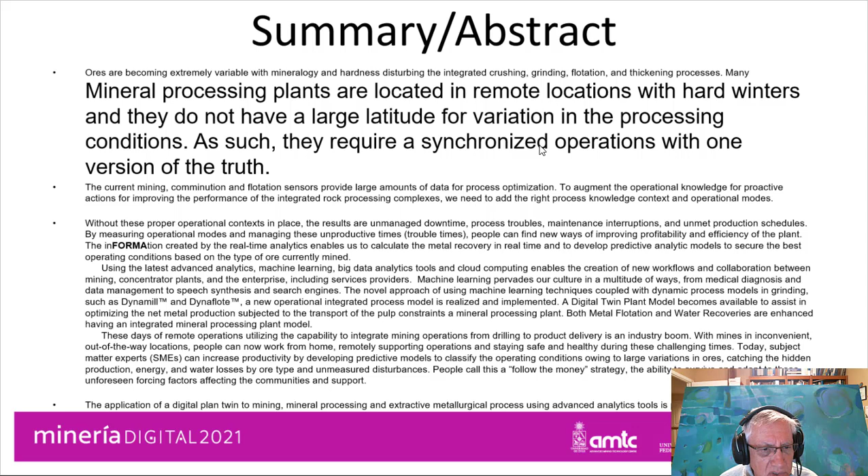You got the summary here. The most important part that I wanted to touch is basically that we have very hard ores and we don't have a large latitude for variation in the processing conditions. As such, they require a synchronized operation with one version of the truth. And this version of the truth is based upon dynamic models, which help generate the mass balances and all the energy and levels and inventories which are required to maintain stable operation.

So we're going to talk a little bit about the digital age transformation secrets, the four steps to maximize metal production, the dynamic decision support using hybrid process models and predictive analytics, and some live examples of what companies are doing.

Today, we need to reduce the variances between the production plan and operational result. We have to cleanse the data and add the missing information for improved decision support. Grinding DynaMill with viscosity model and flotation with air holdup add the missing information to the set of data collected in the operations. And this has to be done by the people at the plant. It doesn't work if we let other people do it. So that's why we require a special implementation strategy.

We have to choose the right KPIs for the digital age. We have the technology to transform the data into real information. So these are the KPIs that we should be using. Effective communication and improved decision support is a must because now, since everything is in the cloud, everybody can access it, but especially because we have the right information, everybody can contribute.

And we have to avoid the hidden production losses and equipment failures in real time. This is a must and sometimes ignored, but this is the most important part when you start building a digital twin plant for your operation. It allows you to synchronize everything together. And of course, you can innovate your operational process using the cloud, this remote work. Now with COVID, this has been a blessing because we can contribute irrespective of where we are.

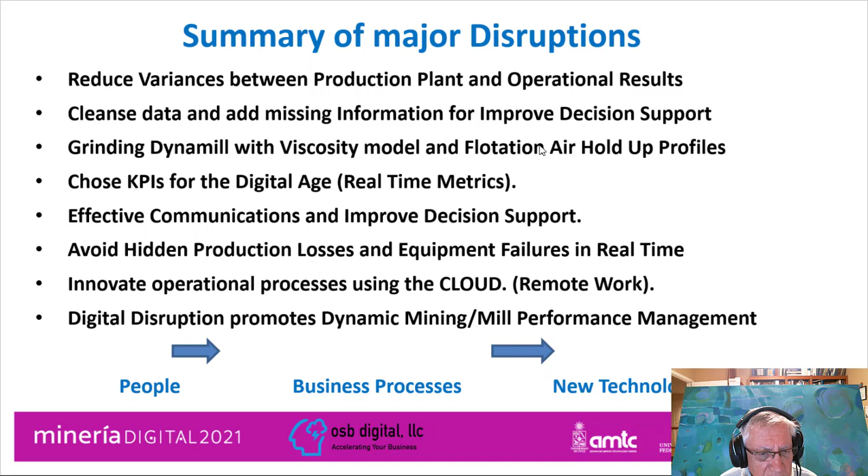This digital disruption promotes dynamic mining, mill performance management. People is the most important. That's what I'm saying. This cannot be done by someone externally. It has to be done by the people. And they change their business culture and processes. And this is what takes time and it requires a special treatment. The new technologies should be embedded into the system so it becomes transparent to the user.

So basically today what we see is that we got all these silos with this breakdown between management and operation. Management requires transactional type information, so we need to use the operation with their event frames to transform the data into transactional information in real time. That's a must. And engineering can use it and put the models, and they are the ones in charge of developing and maintaining the models. They are the ones that understand the process. Maintenance, on the other side, they know the equipment and they can do that. And mine, of course, they can do the mine the way that they understand it.

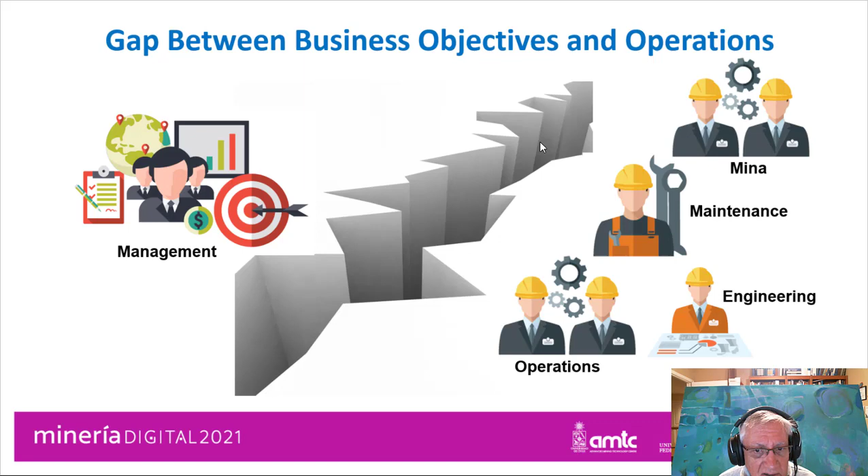So the critical pain points that we see in the production processes are drastic energy and water costs with lower grade ores. There are potential hidden costs due to the trouble times and the downtimes that these plants operate at, because they are very, very hard ores and it's very difficult. Losses of copper through the tailing thickeners. This is due to bad liberation or bad flotation on the roughers. And this is what we're going to take care of today and try to shed light on how we have been able to transform that.

We have a lot of disturbances due to the mineral or viscosity. The transportation of the pulp through the plant has to be flawless. And this is something that sometimes is ignored because we cannot really measure it. So we need to use the most advanced technologies to predict how the viscosity is affecting the whole production line.

And of course, when you start minimizing energy, start augmenting the water recovery, you are more sustainable. You are doing the best with the ore that you are receiving from the mine. So a dynamic water recovery model is something very, very important in today's targets.

We got multiple sets of data, raw data that needs to be transformed. Mining data sometimes is unavailable, so we need to capture that in real time. Not current or missing information is the typical norm. We need to organize that in what we call the digital plant model. There are a multitude of spreadsheets that have to be reduced to one version of the truth.

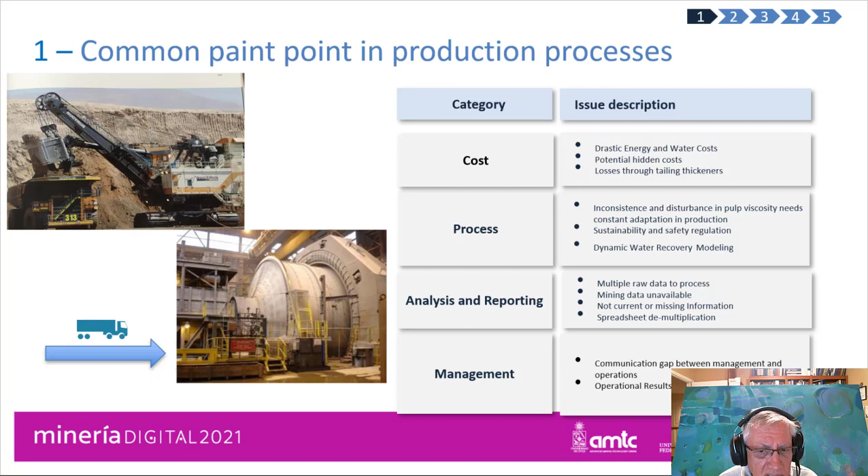Operational results sometimes don't match business objectives, and this is because the people that are doing the planning are not using the real data, I mean the real plant data, and that's really sad. One of the key things is that grinding is not only for liberation, it's also for maintaining the right equipment correctly, the cyclones, the flotation cells, the pumping, and also the most important is the water recovery.

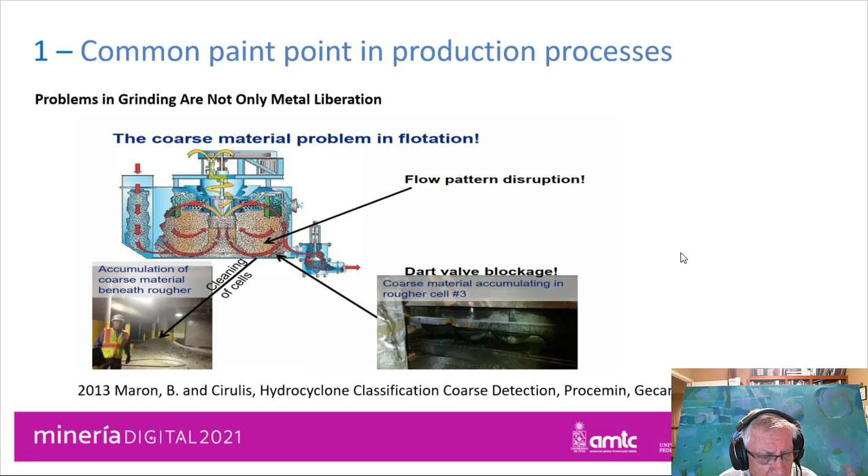The bad size distribution that we can have in a ball mill circuit repercutes throughout the plant. Once we get a bad particle size distribution outside the region in which we can do the flotation, do the water separation, and get the concentrate that we need, we are losing a tremendous amount of money.

So we need to monitor the production loss and failure in real time. We have to predict the production and analyze using tools like Power BI. We need to identify the targets or the tendencies in which the data has to behave so we can identify what we call the constraints of the plant.

These are really the 4 steps that we are using to implement the analytical models using hybrid models with the specific constraints and the variables to optimize your process. This KPI setup is done in real time, respecting the constraints which are identified in the prior step. The third is to really transform that data into information to develop predictive analytic models so we can be ahead of time and not going back and solving problems.

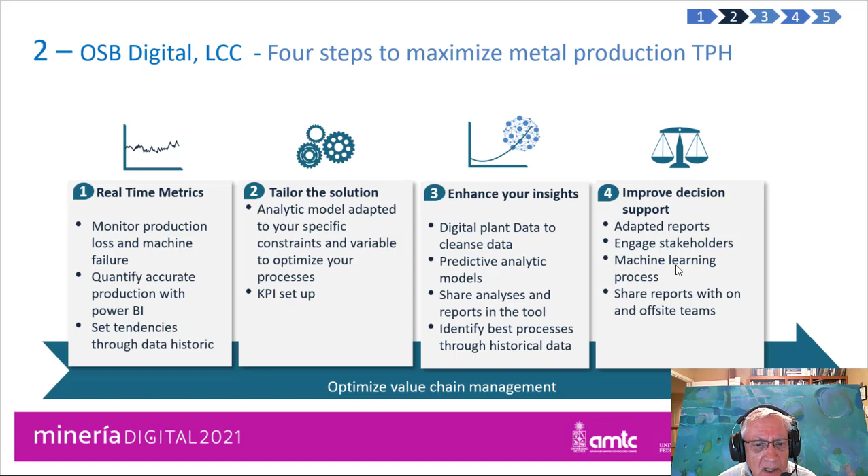We need to share these analysis and reporting tools with management so they get access and they understand in general what is going on. And here we identify the best process conditions through the analysis of the historical data. And as such, we get better reports, we engage stakeholders, we are using machine learning, and we share these reports with people locally and also people that are helping to optimize the value chain management.

We do that by connecting to the historians. In this case, it's the OSIsoft or AVEVA PI System, which connects to a repository that manages the collection of data from many sources. And we can see these sources in the analysis tool, which is called SEEQ Workbench, which is really the human interface to the data and to information, to the events and to the external metadata that is required to model the plant.

Then we have the Organizer, where the engineers and whoever wants to do the analysis are presenting these to the team, to the core team, so they are understanding how the plant is affecting the bottom line. And if you want to involve data scientists, you can also use Python, which is included in the Data Lab environment for further analysis if you require.

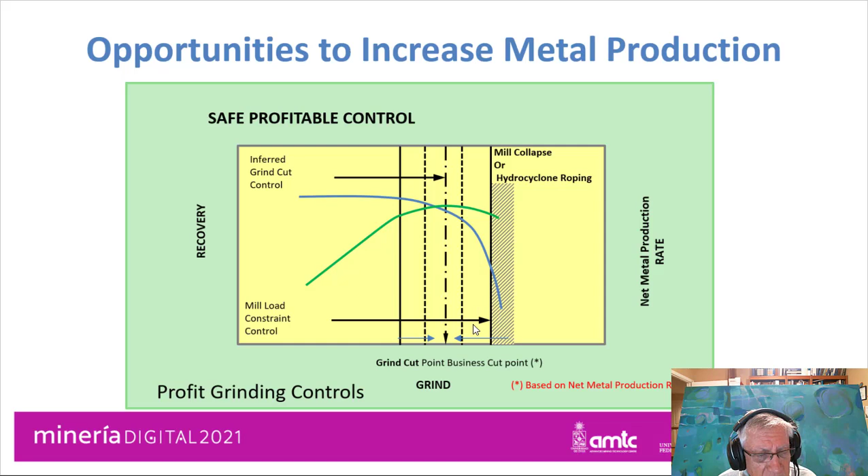And if we got that target in real time, we can really move towards the constraint without violating it, and reduce the variability of your cut point to the maximum. So that reduces as well the changes in rheology that affect the whole plant.

So we modeled that through a digital twin concentrator model where we put objects, which are the crushing, grinding, flotation, thickening, and tailings. And first of all, we manage the whole energy that we are using in each of these steps. We try to maintain the flow as fast as we can. So that's the maximum throughput that is represented through the combination and the synchronization of all the steps in the plant.

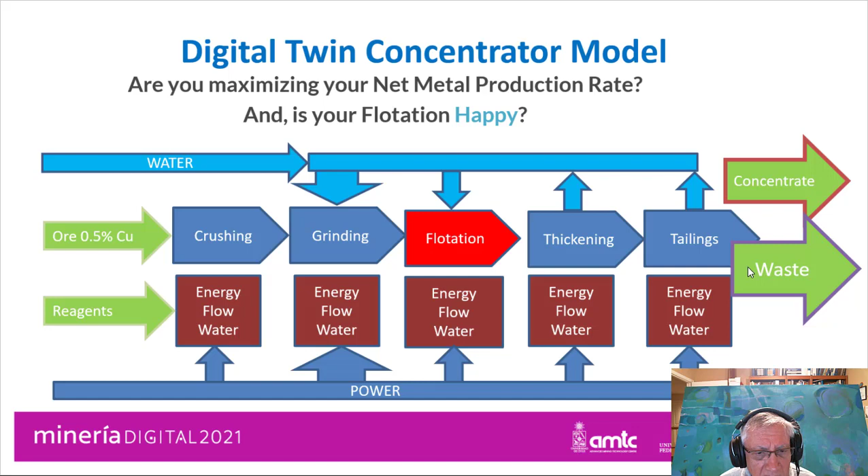And then, of course, we are using water or recovering water in certain areas, and that has to be managed so we get the maximum water recovery while we are maintaining the maximum copper production and the waste with the minimum copper losses. The key thing of the digital twin is that we have the metal copper production in real time as a metric that we are calculating every time that we are moving in time according to the mineral type, the mine planning, the cutoff grade of the mine.

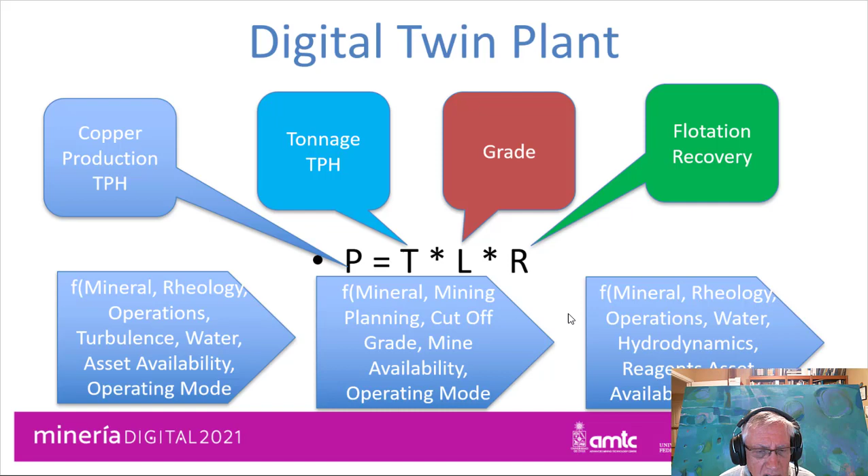If you want to do this for water, it is the same. The water becomes extremely affected by the tonnage, of course, the grade, and the rheology of the plant. This is the rheology of the operation, the water, the hydrodynamics on how we are moving the particles, bubbles, and water through the plant. And of course, the availability is very much included in the way that the recovery is calculated and so on in real time, because this is too much information for someone to do it. The computer is trained to understand this problem.

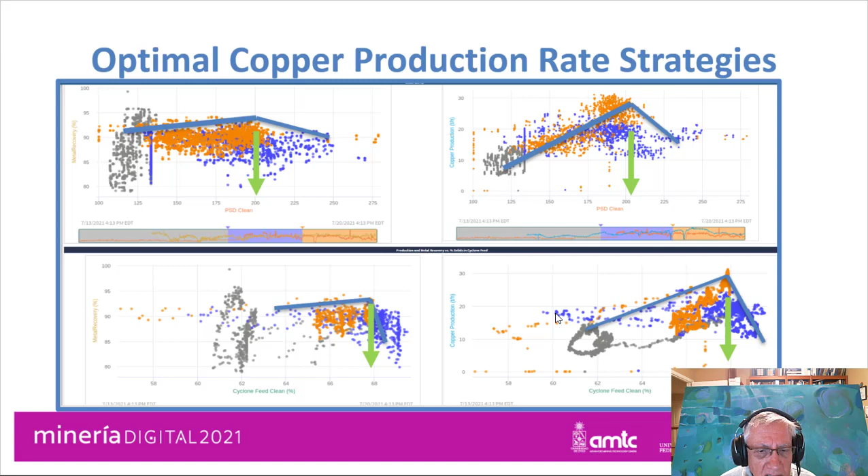And we see here the maximum pulp density that we need to feed the cyclone. We can see the densities that we have in the mills. All those are calculated with the soft sensor, which are included in the digital twin plant model. This is an example where we tailor the solution. We are calculating the size distribution entering the grinding. We're calculating the size distribution coming out of the grinding circuit,

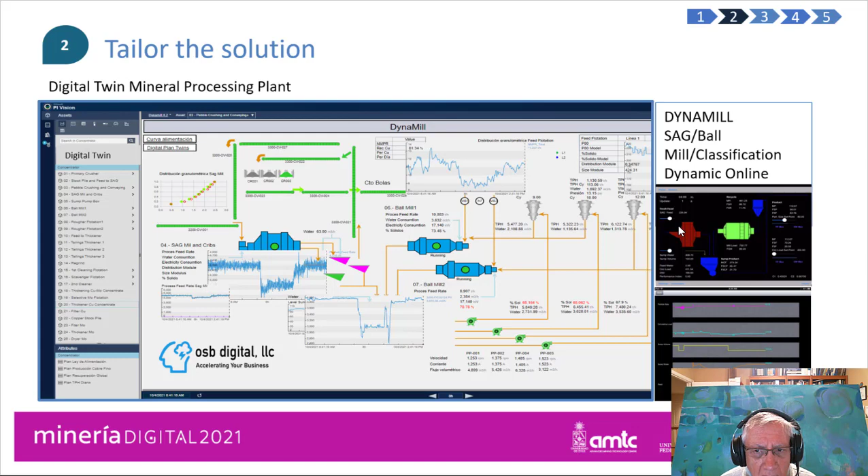and we are seeing how this is affecting the net metal copper production in real time, the effect on how we are managing the viscosity in the plant by having the right densities throughout the plant and not having large viscosities, with which you get bad grinding, and of course you can have overflow of the mills or roping in the cyclones. And this is done in concert with the model that has been generated over the years, which is called DynaMill.

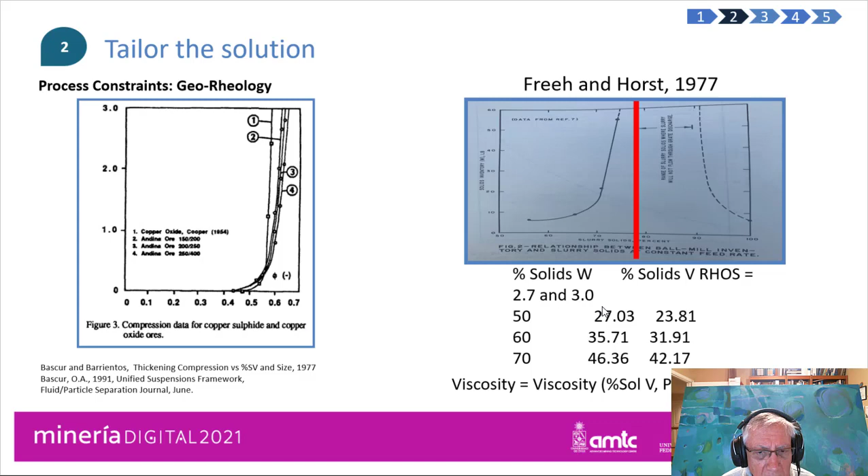We can see here the effect of the nonlinearities that happen both in grinding of different particles and also the rheology, which is affected by the size distribution and the effect of when we get into a very dense pulp. And of course, the changes that we might have in density of the mill are also included, so we can identify what the constraints really are in real time.

This is the flotation model. The flotation model is a first order process in which we have a tank with agitation, and we are catching the particles through the bubbles that are being generated, and then these are moved up into a column, and in the column we have to know the air holdup at the bottom here and then at the top, and we are doing this management of air that provides the best recovery possible at all times by doing that in real time.

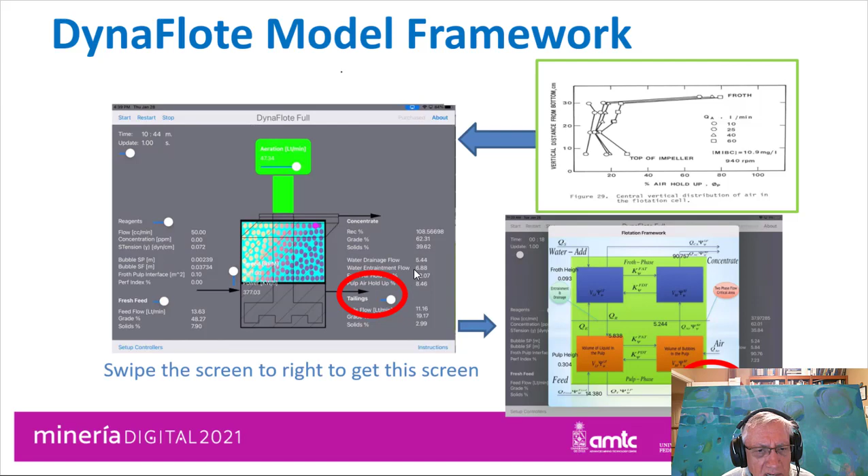So you can see the froth is changing because as you change your tailings, you can change everything in your cell. So you have to be very careful on how you manipulate your tailing for the bank. And as such, we manipulate that correctly by identifying what is the best profile that we can get for all these variables that are here. This is a lot of information that the only way it can be understood is by applying the latest algorithms that we have developed, and they are available for deep analysis.

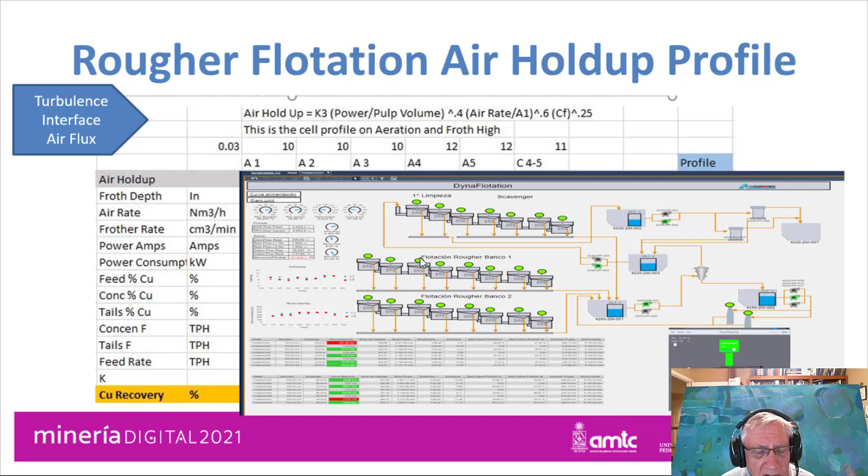Here we can see the net metal recovery, production, and we have the P80, and then we understand all the variables which are associated and the effect that these are having, which are the ones that are constrained, the ones that we can manipulate. So we have a good X-ray of the plant, both from the grinding perspective and the integrated grinding flotation.

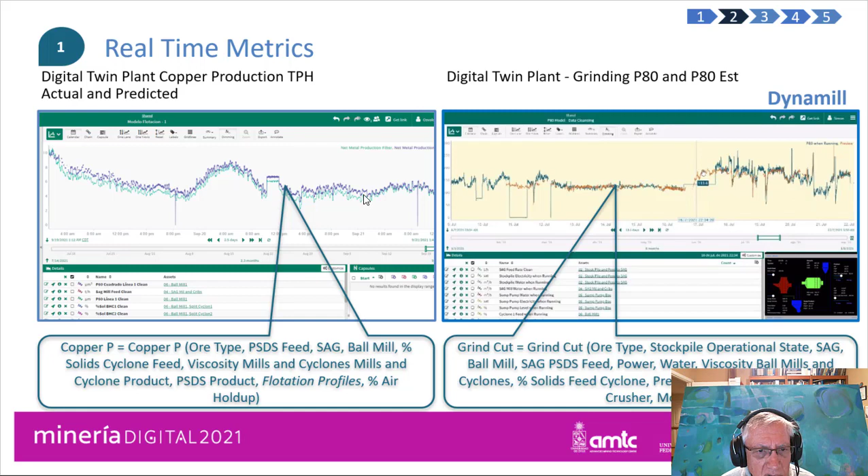We also have the thickening. I don't have the time to present that today, but basically we see that if we improve this grinding, the water recovery also improves. And the problem is to solve this problem as you are going. Are we on target or are we getting out of target? Identifying the root causes and developing the models is part of engineering.

So they are the ones that are using the tools, coming up with a solution, and then management needs to decide what are the alternatives, where we need to go, what are the decisions. There are so many important things that need to be done as we are moving through time, month, and so on, because the ores are changing drastically. It's like receiving a different ore every day.

So this is where we need to identify the capital investments to really maintain the plant and innovate with the data that we have. So the data is not only used for reporting, for building the model, it's also for defining what are the incentives to do things which sometimes might take some time. So that's what we call the left brain, where we try to go with the plant, and the other one, which is really challenging the plan.

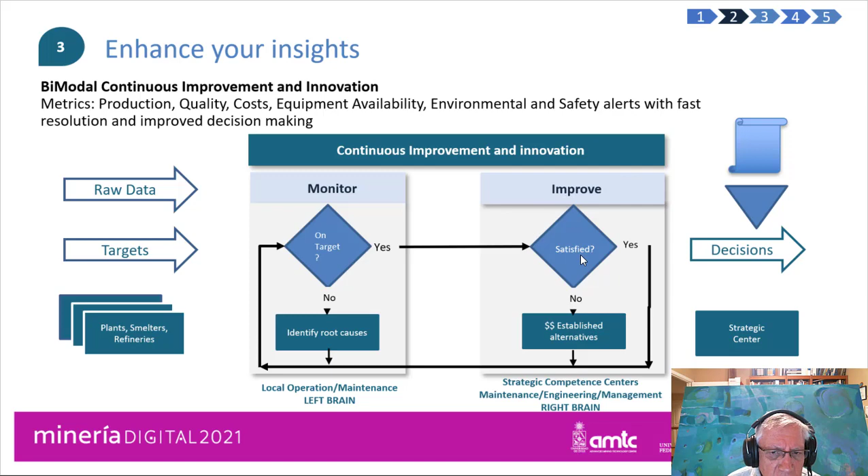Why don't we do this? Why don't we do that? Can we do that? So this enables you to do a lot more analysis, which is required in today's way of running the plant. And of course, people, new technology, and business play this triangle here, where we have to decide faster with the best information. We have to communicate this correctly. So the system that we are suggesting enables you to do that by getting everybody to work together.

And the new technology is available, so we need to train the people in this. The skills have to be changed. So that's why we spend time with the engineers, who in 2 months are really up and running better than anybody because they have the problem and they understand the problem better than anybody. That's called subject matter experts that are retrained to use this new tool.

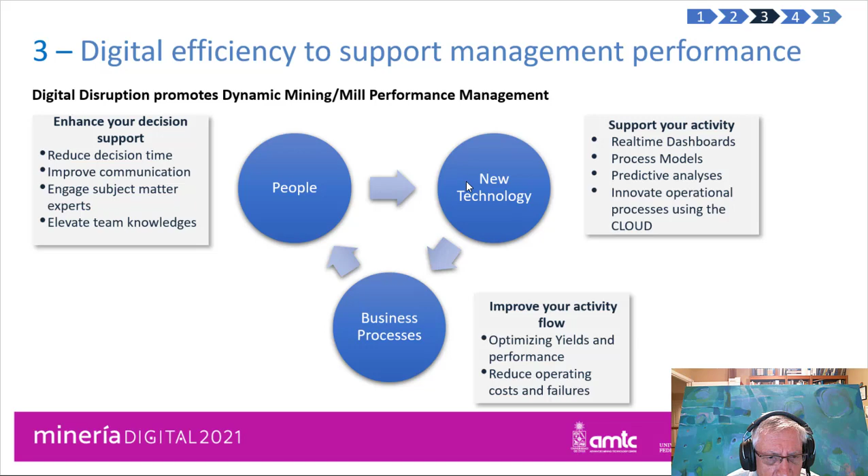And then we get new business processes where we can have optimization of the yields, optimization of the cost, and equipment failures in real time. So we get maintenance, engineering, operations, and management working together. So we have many examples.

The most advanced one is ArcelorMittal in Canada, where they have two open pit mines, one pellet plant, and the railway, and of course the grinding plants, which have 8 lines of AG milling and separation. By implementing this digital twin model for the whole complex, they got 120 million additional revenue in 2015, and this is now being revised, and now they have a center of competence where they are really improving from where they got started a few years ago.

Anglo American is pretty much also a multi-site environment where their target was 15% reduction of energy. So they came up with many projects, and the key thing was to really connect with the local energy provider. Barrick had the same problem, very large variation in the mine. The gold recovery needed to be understood much better, so we implemented the size distribution model for the grinding and for the cyanidation and the recovery of the gold, which is trapped in the solids, by improving the operating parameters, of course.

Lumina Copper, where we're using now SEEQ, in addition to the other tools that we were using before, that are really embedded into the use of the real-time series information collected by the PI system. So active stabilization of the plant using the predictive models to avoid the constraints and identify the losses when those constraints are being violated. And that is really how people change, when you are following the money on how you're operating the plant.

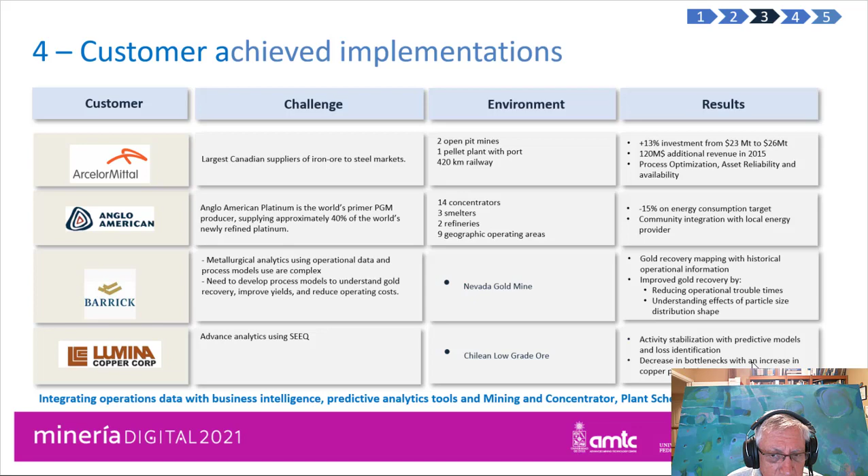So we are decreasing the bottlenecks, and this is very important to identify where are the constraints and how the bottlenecks are changing depending on the type of ore that you are producing. Because the rheology changes according to the size distribution, mineral type, and so on. So it's a never ending story there.

So the key thing is to develop this digital twin plant to be able to hand that to the people to identify the losses. Once the losses are discovered, we tailor the model, we do the predictive model generation, we deploy that in real time, and management and coaching after deployment support is available, and is available through a cloud solution. Because really, this can happen and people are moving around.

They might be at the mine, they might be in the capital, they might be where they're living, and so on. So it doesn't matter where you are today, this happens anywhere. And then we optimize the operation fluidity and profitability.